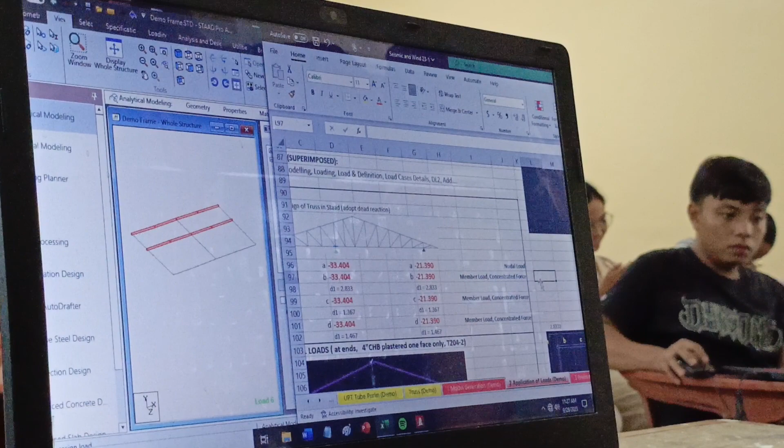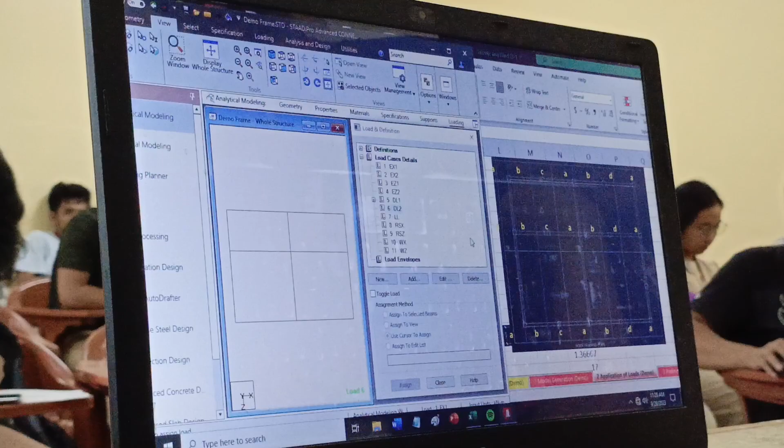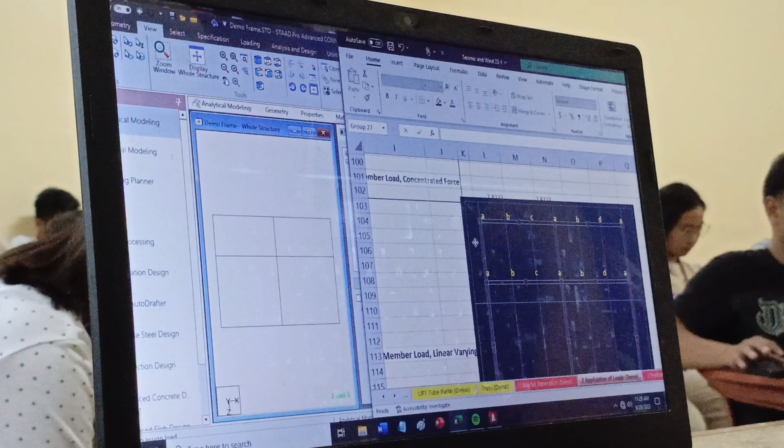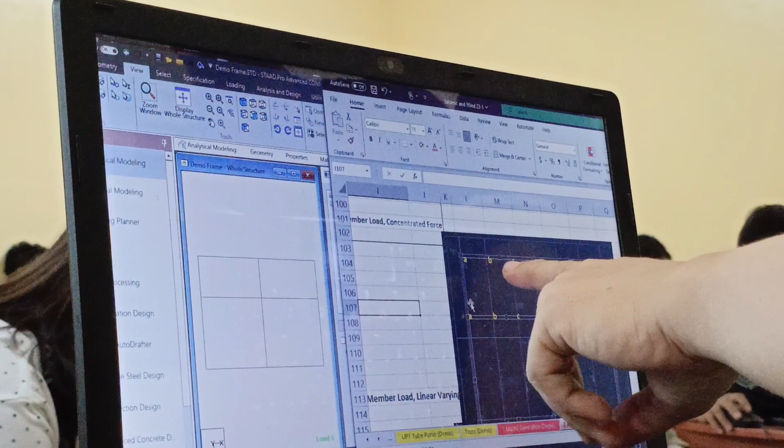This is critical, guys. Ito yung ating roof beam. Ayan. Ito yung ating trusses, yung violet na yan. Ayan, ganyan yata. So, this is A, this is A, this is A. So, ang ibig sabihin ng A, this is nodal loads. And then, yung letter B, this is concentrated load. And then, letter C, that is another concentrated load. Ngayon, tingnan mo si letter B, parehas siya doon. Diba? Ibig sabihin nun, ano yung distance between A and B?

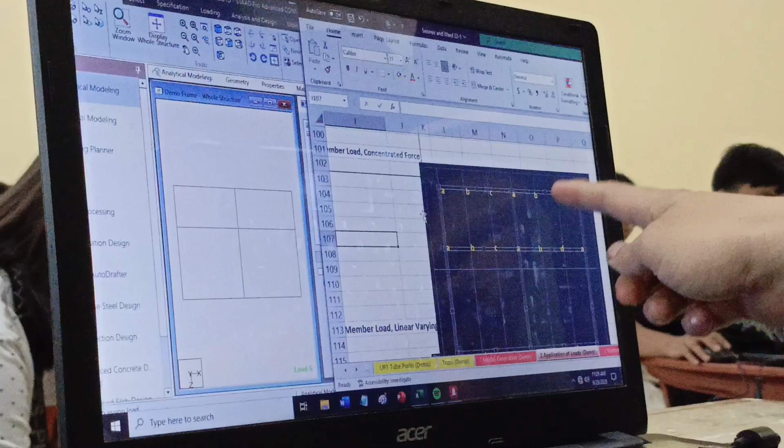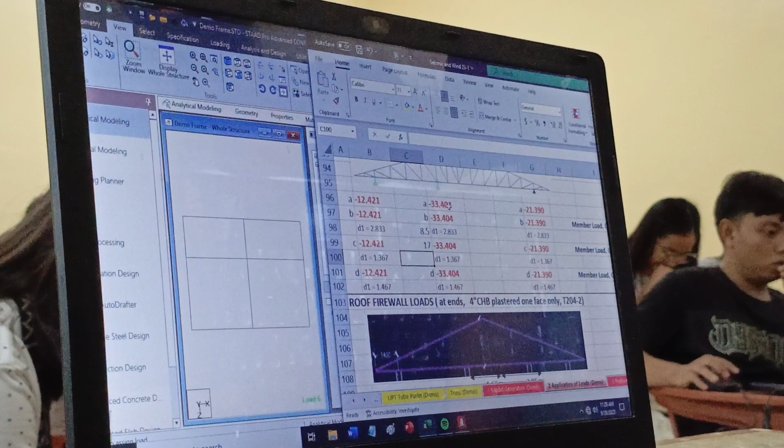Now, to get the distance between A and B is, syempre, alam mo yung length nitong width ng building, you simply divide it by 1, 2, 3, 4, 5, 6. Diba? In my case, in my beam, that is equal to 2.8333. Okay? And that is equal to, I think, 4.2 plus 4.3 times 2. So 17 meters yon divided by 6. So 17 divided by 6, yan yung 2.833. Next.

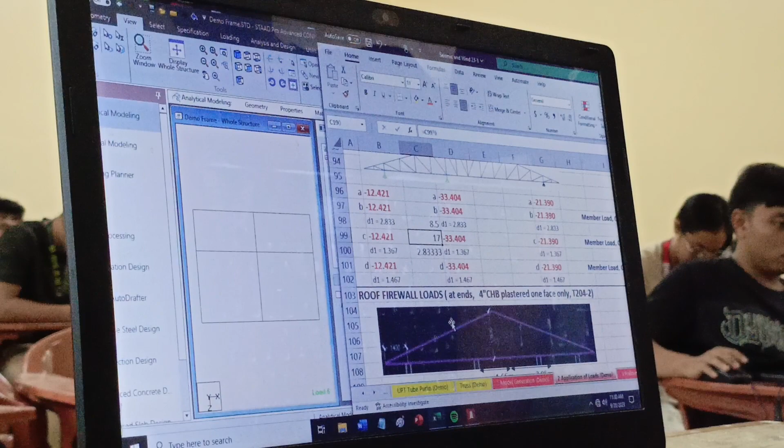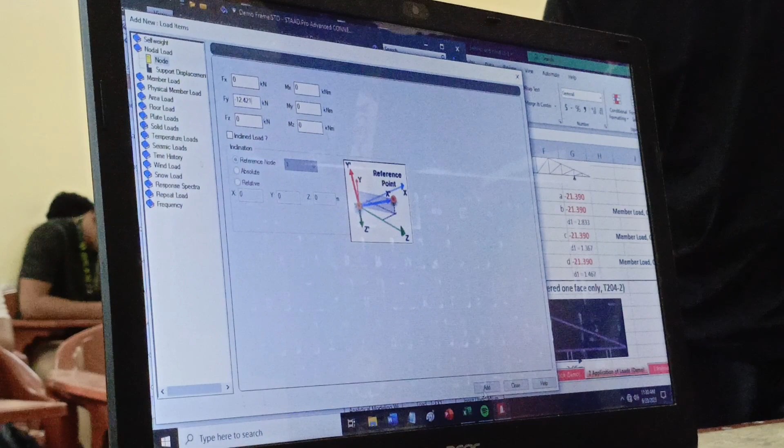So, ang una nating lo-loadan yung mga nodal loads. So, let's now go to DL2. Add nodal load. And that is 12.421. So, FY, negative 12.421. And then, add. Then close, tapos ayan, isometric natin, i-load na natin kaagad. So use cursor to assign, click, click, click. So natapos na natin si letter A. Next, punta na tayo ngayon kay letter B.

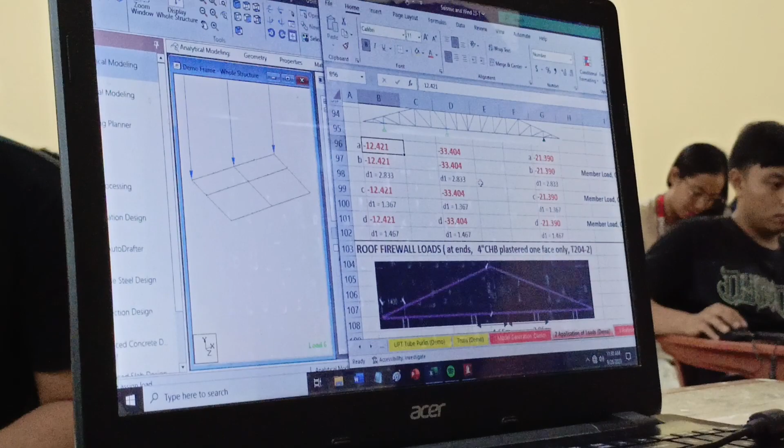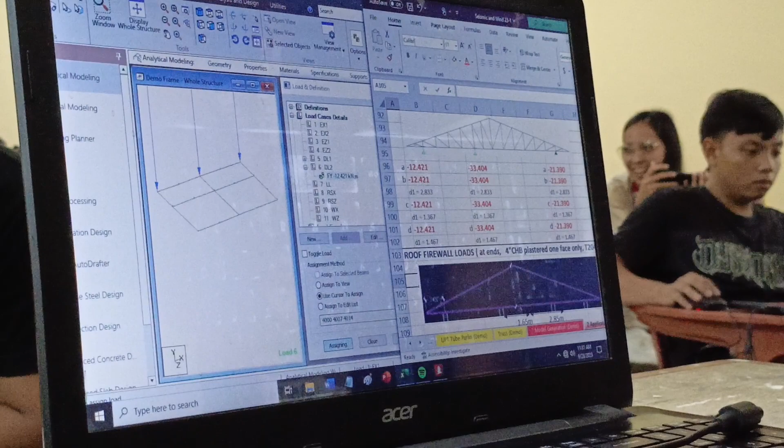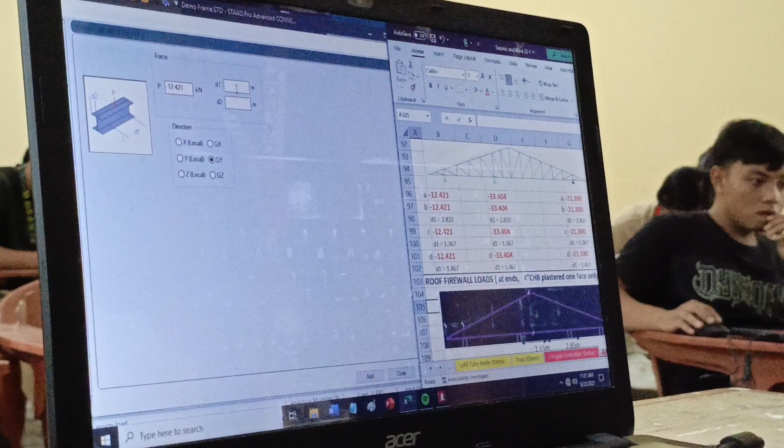Take note that we are only loading this side of your truss, of your roof beams. So ang distance ni letter B from the start is 2.833. And it is also negative 12.421. So balik tayo kay DL2, add. This time it is member load pero concentrated force tayo at negative 12.421 with a distance of 2.833, global Y, and then add, close. Tapos i-add na natin kaagad yan.

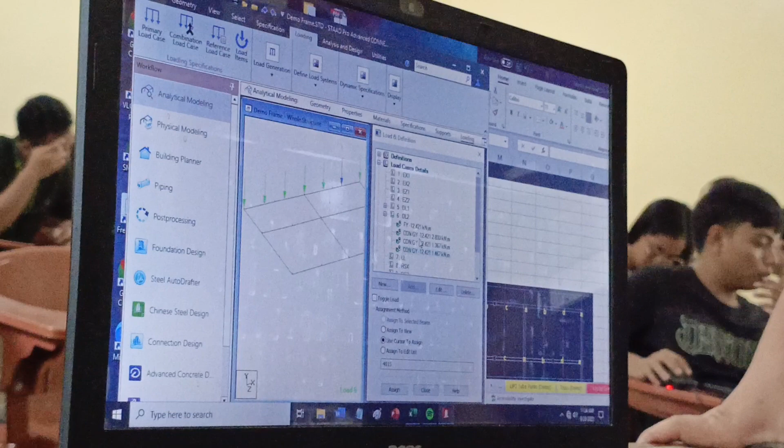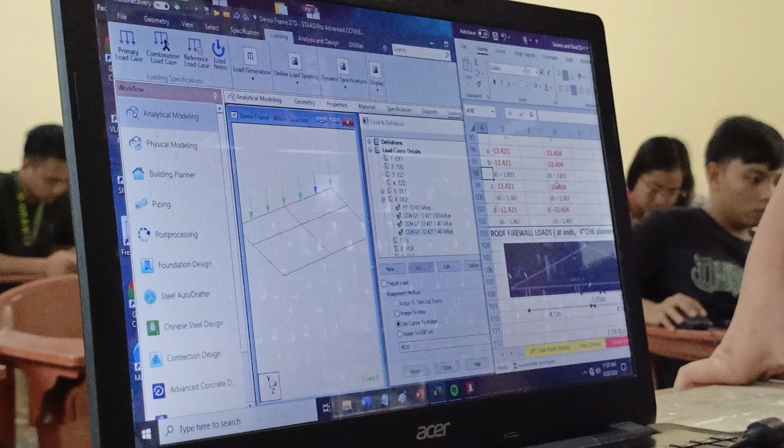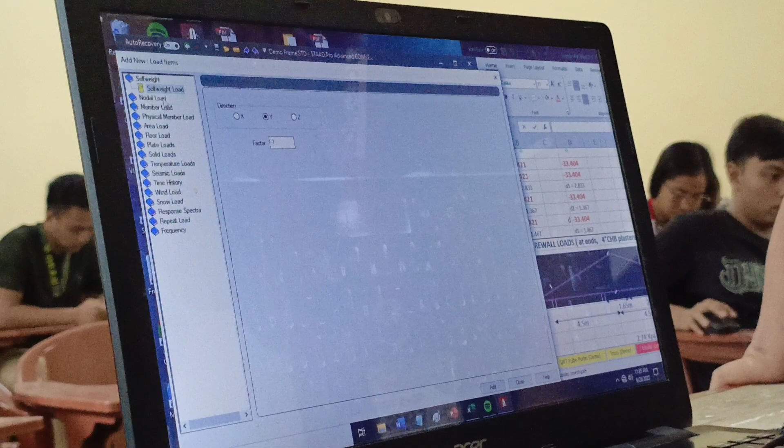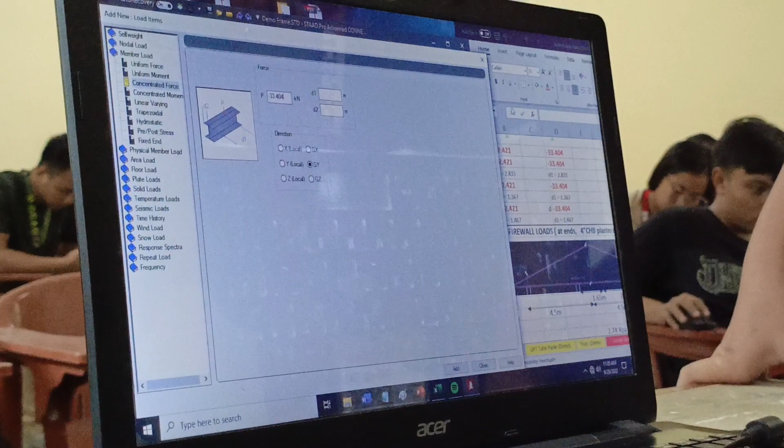So, eto naman. Okay? Ngayon, sunod-sunod ko nang ilo-load ito. So, dead load 2. This is nodal load. Then, minus 33.404. Add. Tapos, member load, concentrated force, minus 33.404. Ang D1 ko ay 2.833. Add.

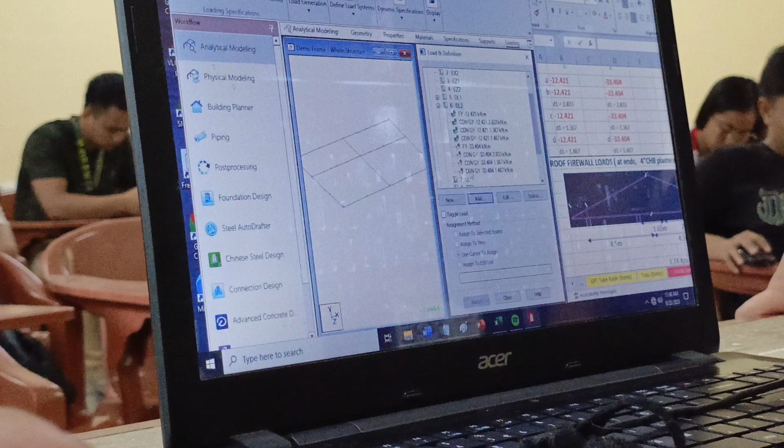Tapos 1.367, add, and finally 1.467, and then add. Okay, next, so ito ilo-load ko ngayon dito sa nodes.

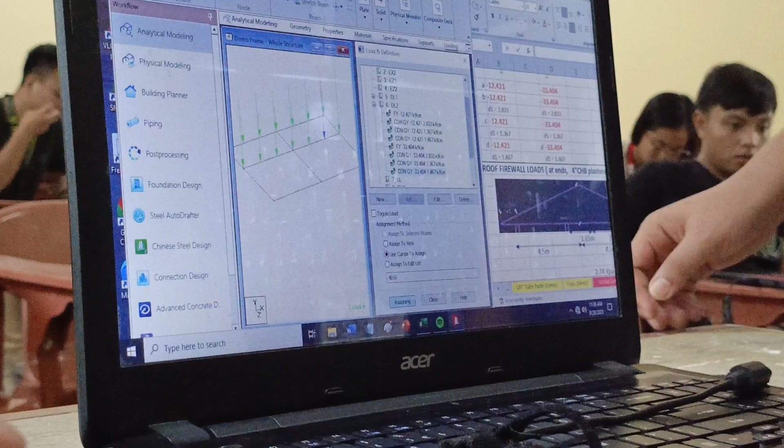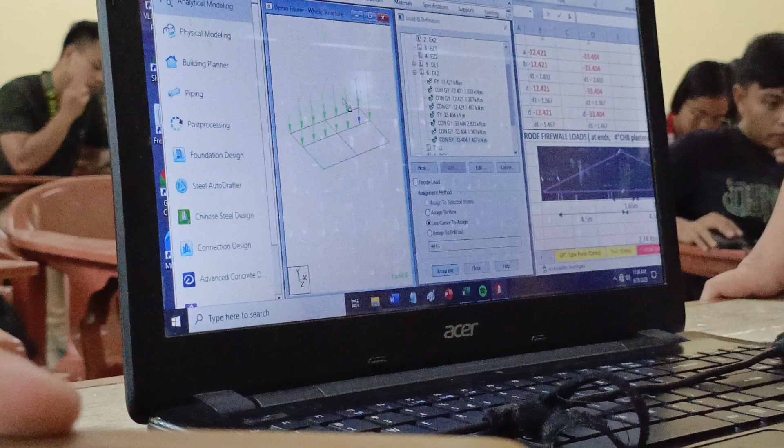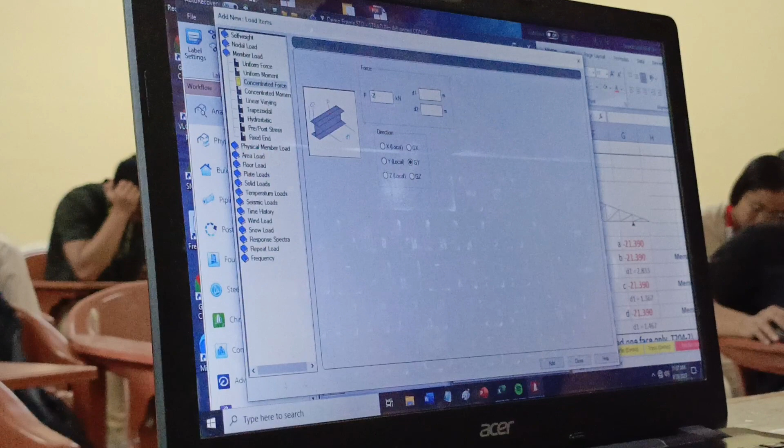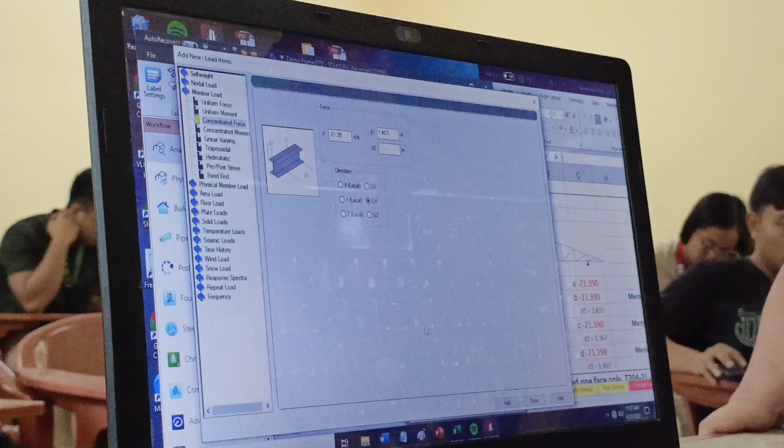Next, so ilo-load ko naman itong nandito na, which is 21.39. Still at DL2. Nodal load minus 21.39, add. Member load, concentrated force minus 21.39, D1 is 2.833, add, 1.367, add, tapos 1.467, add, then close.

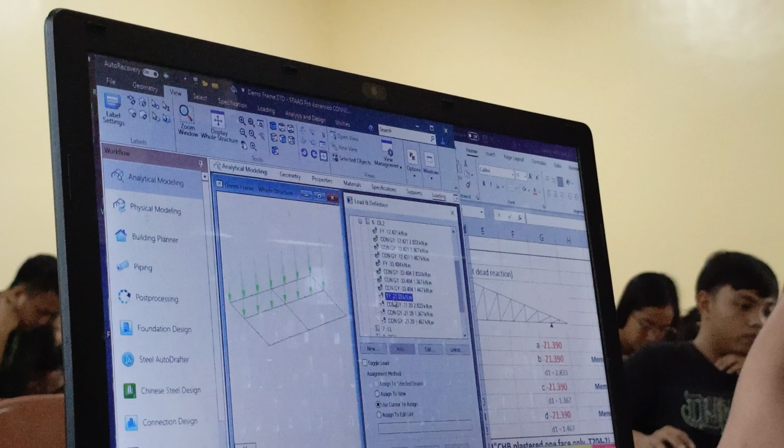Okay, let's continue. So ito yung nodal loads, so assign, and then this dyan, tapos yan na. Check your loads once in a while, i-rotate mo lang yan, dapat magkakatapat sila. So let's look at the front view. Yan, see? So tapos na tayo ngayon sa truss loads.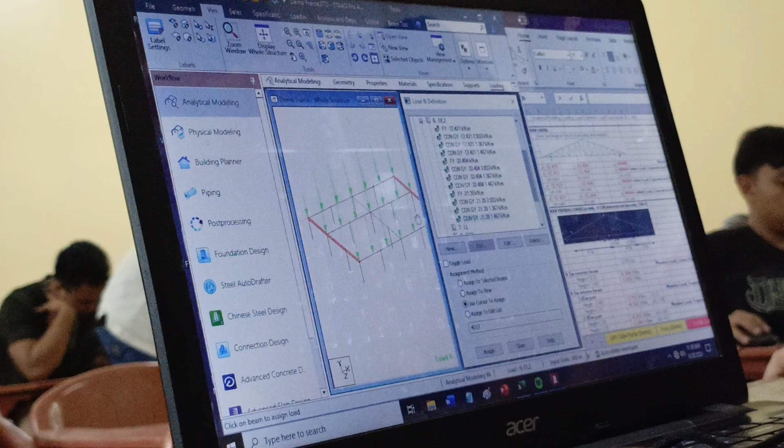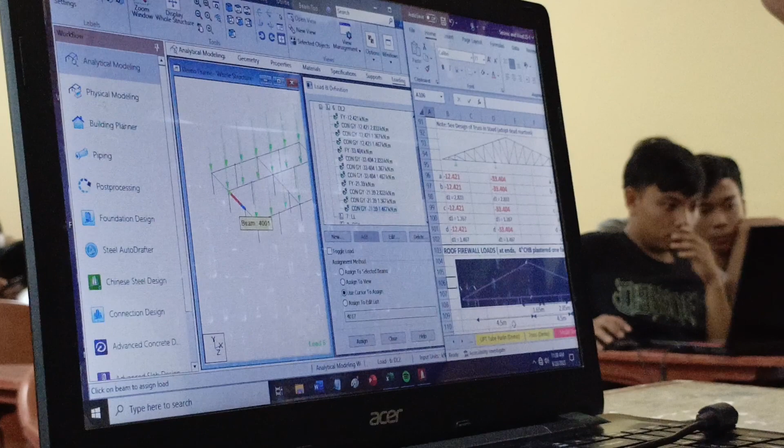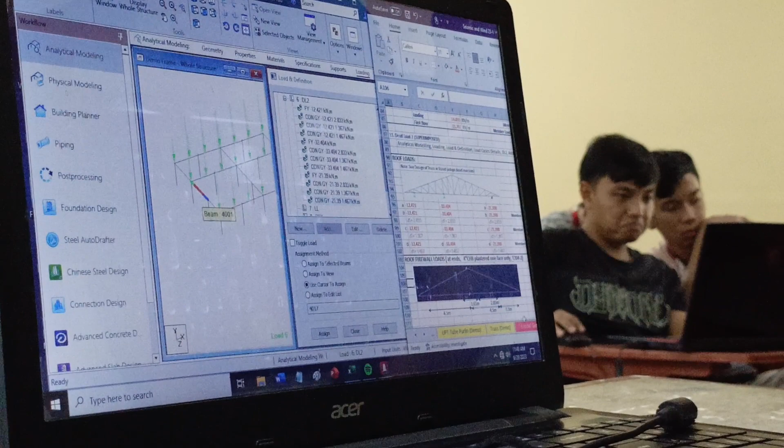Ang una kong lolodan is etong 4.5 meter beam, which is this one, 4.5. And then this is also 4.5 meter, which is this. Pero dito kay 4.5 meter, dalawang trapezoidal load yan, mula dun hanggang sa gitna ng truss, and then from gitna ng truss hanggang dito sa support. And finally, dito sa 3.3 meter beam, which is this, single trapezoidal load yan.

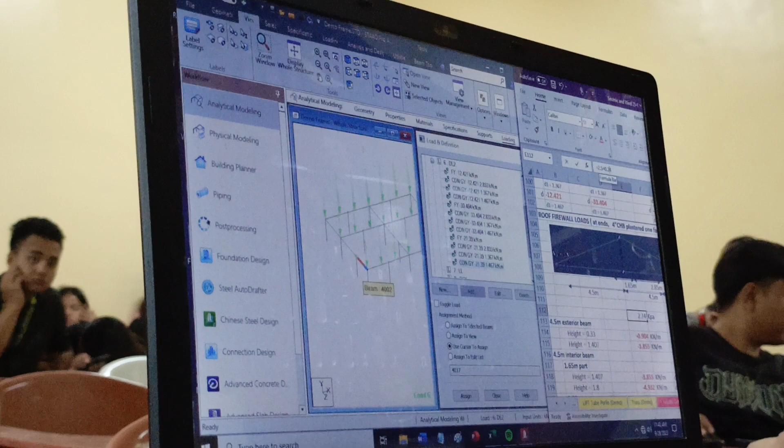So unahin natin ngayon ito. Yung 4.5 meter beam, paano natin i-derive yung load niyan? That is simply 2.74. Yung 2.74 na yan, galing yan sa NSCP. This is 4 inches CHB with plastering on one side only. Ngayon, ang height ng wall at this point, let's say 0.33. Tapos pagdating dito, yung height ng wall mo, 1.407.

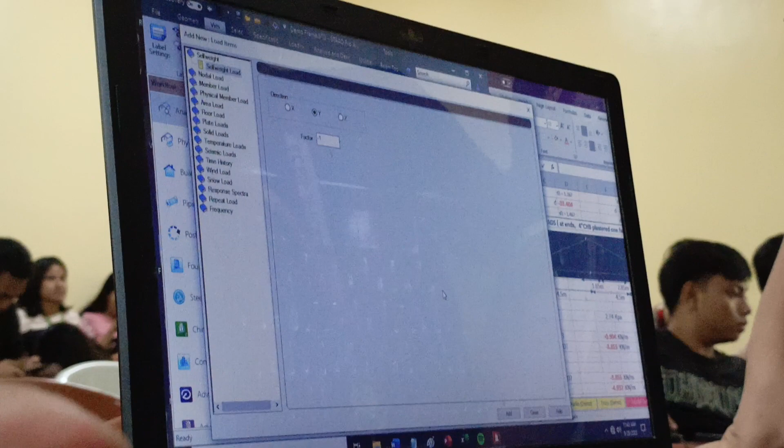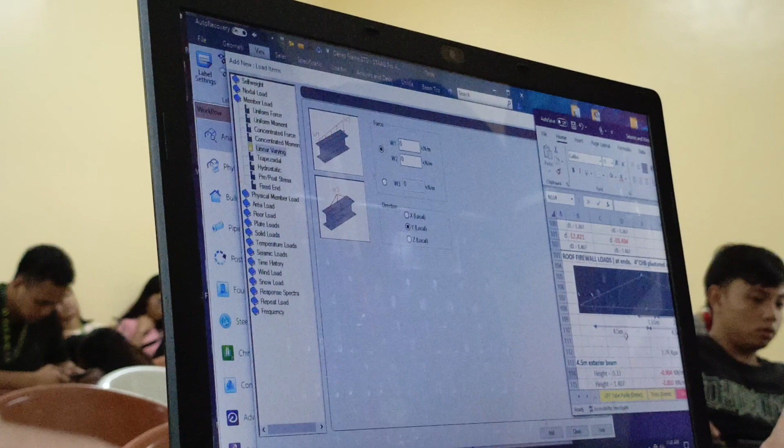Okay? So punta ako ngayon dito kay DL2, add, tapos member load, and that is linear varying. Ito. Yan. Dito, that is negative 0.904 tsaka negative 3.855 and then add and then close.

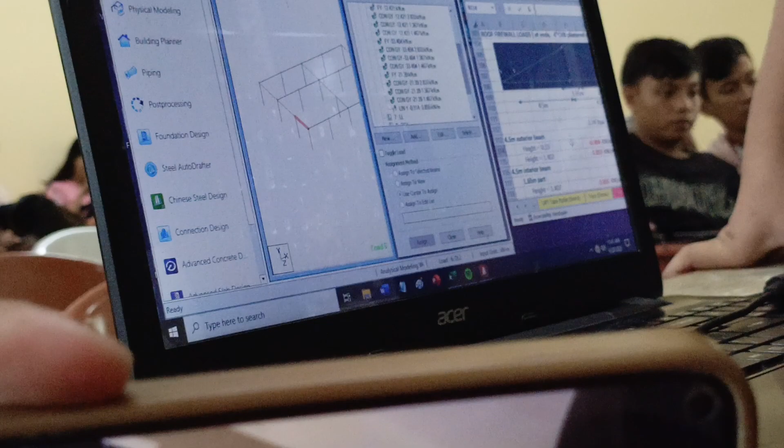Ngayon, itong 0.904 that is equal to 2.74 times 0.33. Negative siya kasi pababa. So likewise, ganun din using cursor. Click ko dito. Yan. Tsaka doon sa kabila.

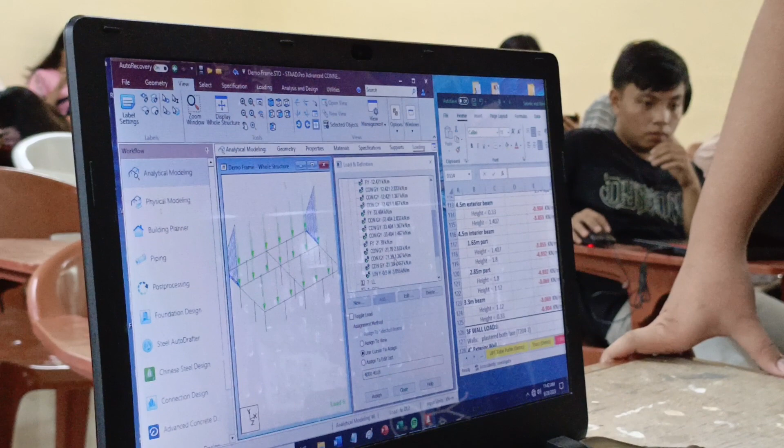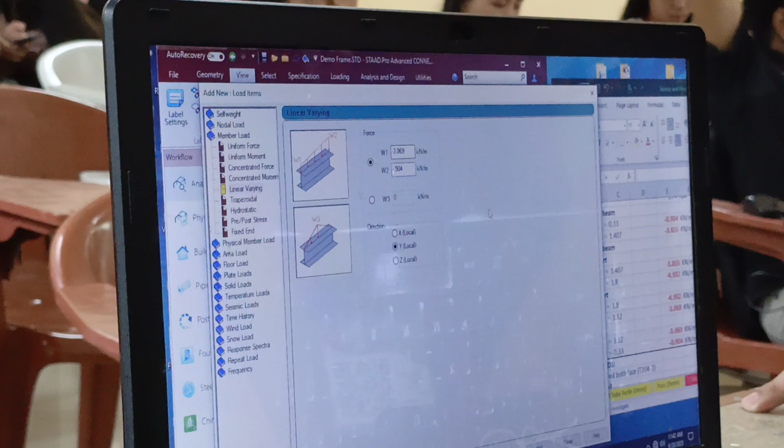Next, punta tayo ngayon dito kay 3.3 meters. Likewise, it is also linear varying. Member load, linear varying. This time, it is 3.069 tsaka negative 0.904. Add, close, then we will assign it here.

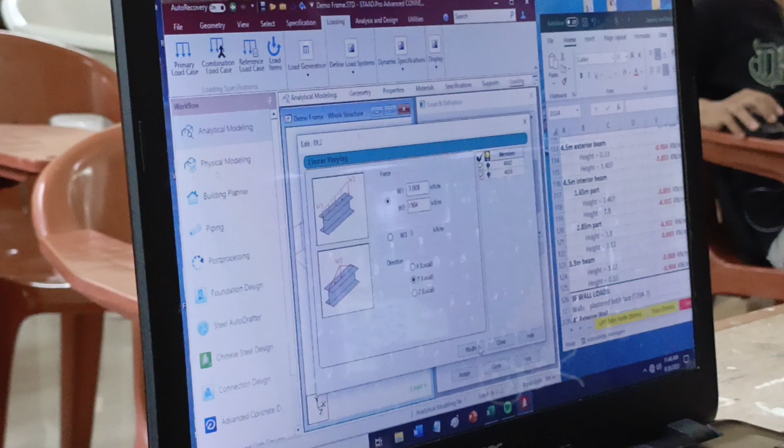Dito. This time, this is not linear varying, but it is trapezoidal.

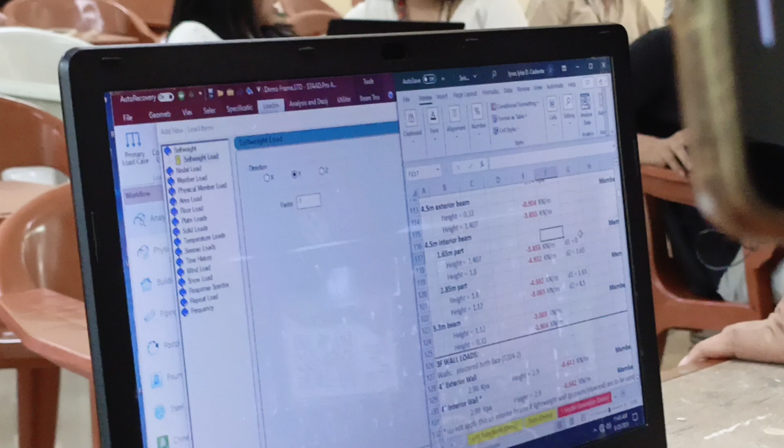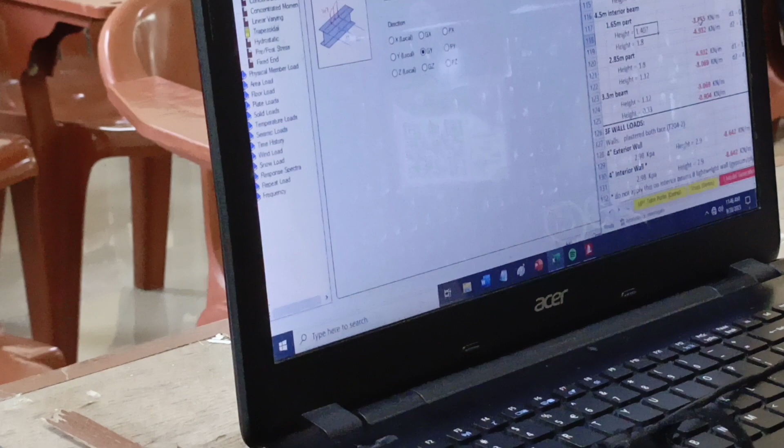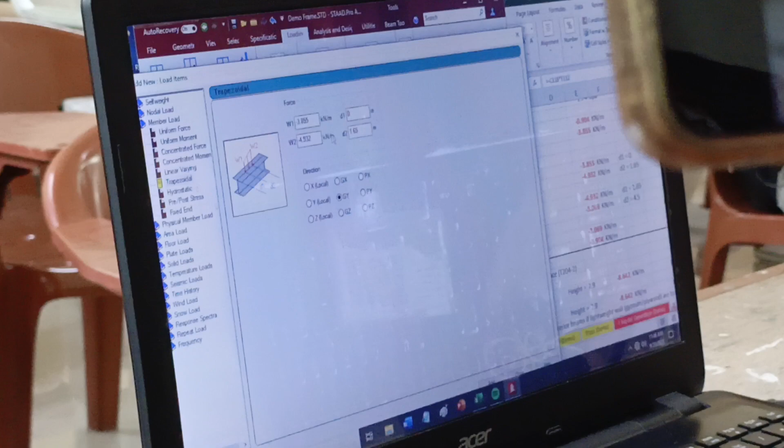Okay, so punta tayo ngayon sa 1.65 meter part ng beam. And ang gagamitin natin dyan ay member load trapezoidal. So, member load, then trapezoidal, tapos W1 is 3.855. Ngayon, ang height nun ay 1.407. So, minus 3.855, tapos minus 4.932. Ang D1 natin ay 0. Tapos, ang distance is 1.65. And, add.

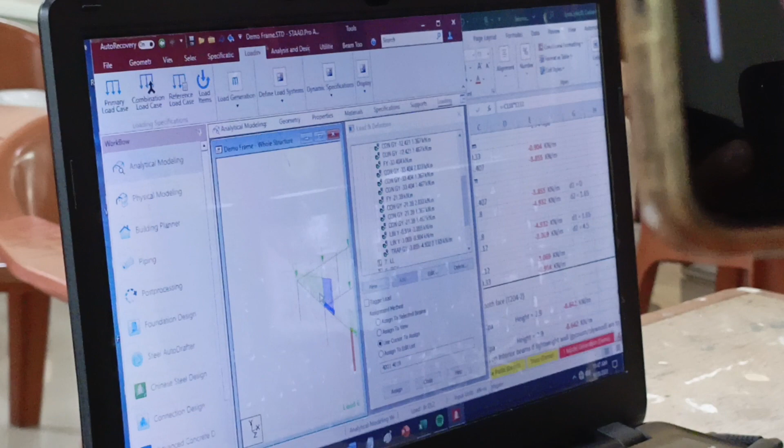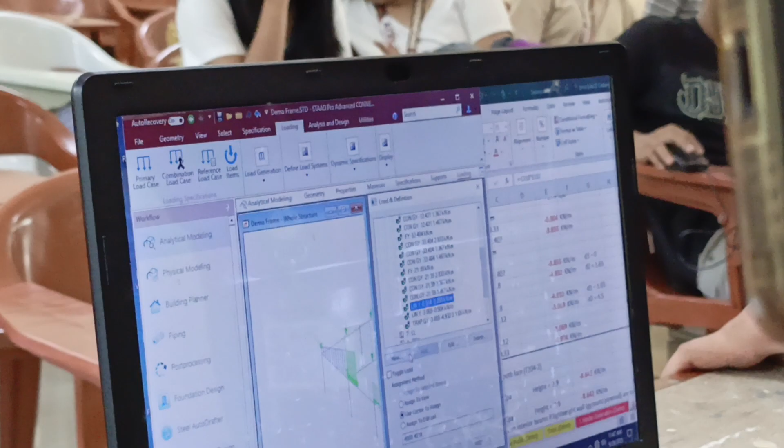Close ko to. See what happens. I will now assign this here. So, mapapansin nyo na magkatapat sila. Ito, tsaka yun. Dahil yung linear varying load is 3.855 yung dulo. Samantalang itong kulay green na yan, it is the same, 3.855 din. Kaya magkatapat sila.

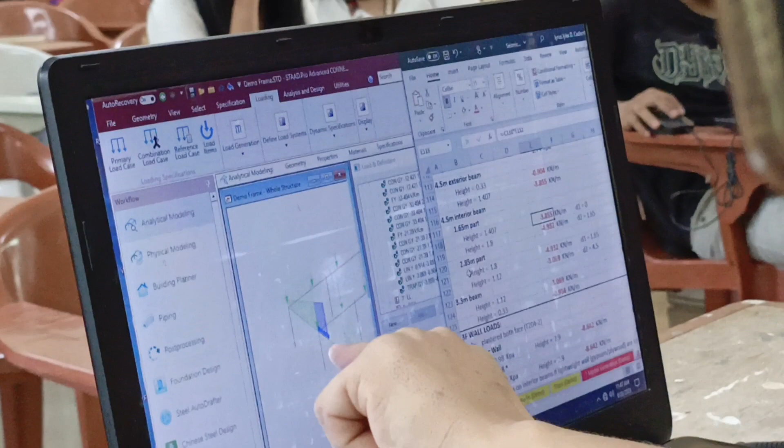Next, loloadan na natin itong 2.85 meter part. Yung 2.85 meter part na yan is yung remaining space. So, balik tayo dito kay DL2. Minus 3.069. D1 is 1.65. Tapos, D2 is 4.5. Notice na yung aking D2 ay 4.5 meters na.